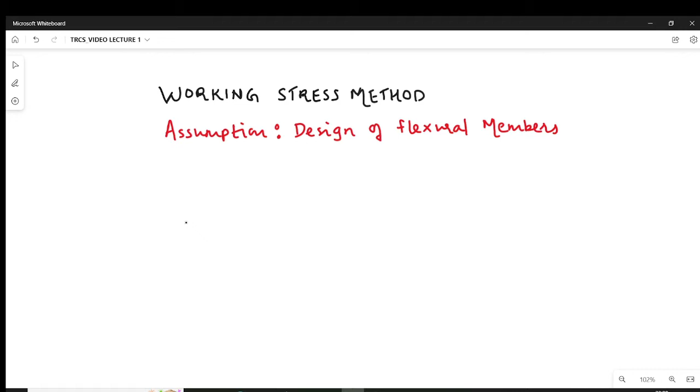In this video, I am going to talk about assumptions in working stress method regarding design of flexural members. Beams and slabs are called flexural members because flexure, the bending moment, is the predominant internal force in beams and slabs. That is why beams and slabs are primarily designed for flexure, though in some cases shear is also predominant. This is the first assumption in WSM philosophy with regards to flexural members.

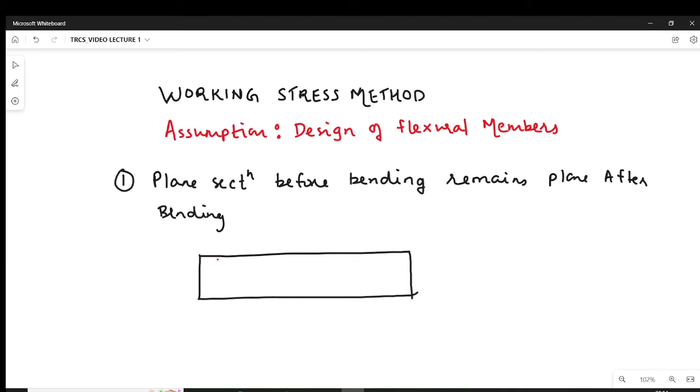Plane section before bending remains plane after bending. It is also the very first assumption in LSM philosophy with respect to flexural members. This assumption talks about the cross section of the beam - what happens to it before and after bending. Here I will draw the longitudinal section of the beam, and you can say it is before bending. After the application of load, the beam bends in this way. So this is the final profile of the beam after bending.

Before bending, the cross section is plane. Naturally it is plane, and something happens to this cross section after bending. The cross section is distorted, the shape is changed, but it does remain plane. It is not a curved surface, it is a plane surface. So this is the assumption: before bending and after bending, it remains plane.

One more thing we can derive from this assumption: the distribution of strain is linear. I will name here, AB before bending, and after bending it is A dash B dash, which becomes inclined. So you see, the distribution of strain is linear. This is the point of neutral axis wherein you don't have any strain. Above neutral axis, the section is subjected to compression, and below neutral axis, the section is subjected to tension, but the distribution of strain is a straight line. Linear means the distribution is straight line. This is what we can learn from this assumption.

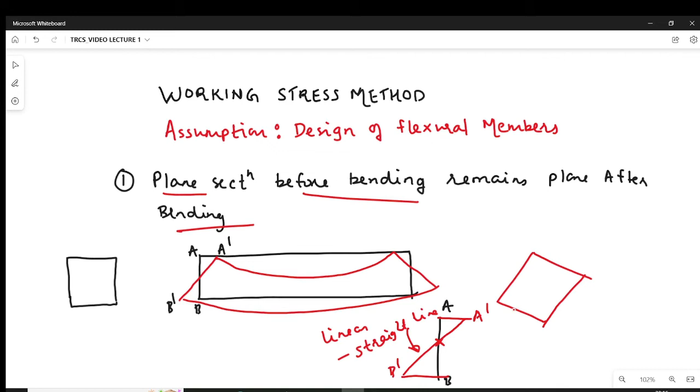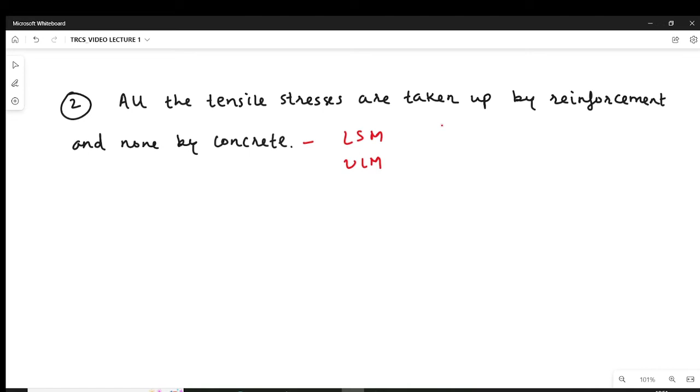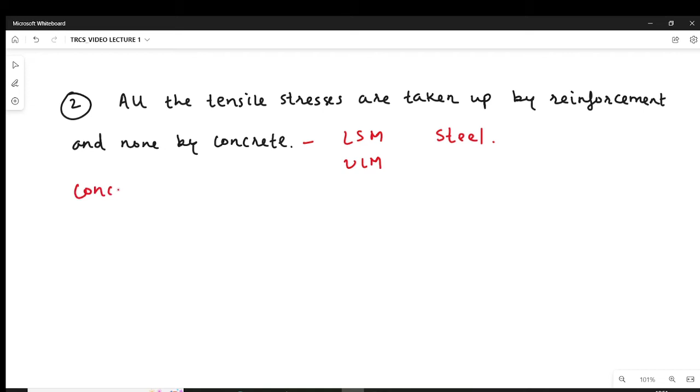Here we have the second assumption, which says all tensile stresses are taken up by reinforcement and none by concrete. By the way, this assumption is true in all design philosophies - in LSM, in ULM, we take this assumption. We say concrete is not capable of taking tension, so all tensile stresses are taken by reinforcement, by steel. This assumption goes by the basic properties of concrete. Concrete by nature is a brittle material, and any brittle material will not take any tensile stresses.

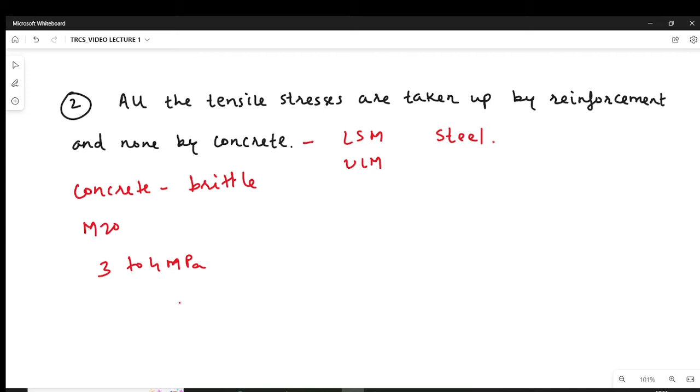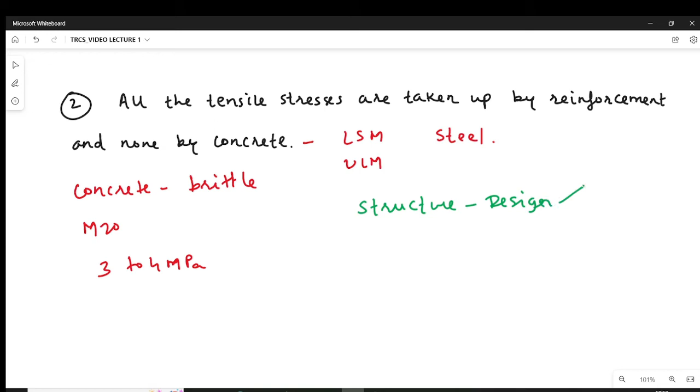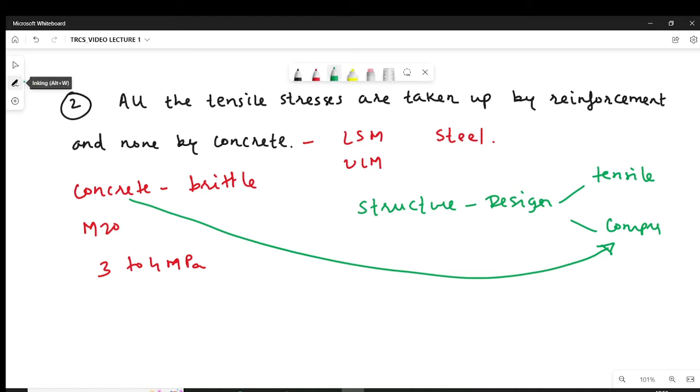But we do have some tensile strength of concrete. For example, for M20, we have tensile stresses up to 3 to 4 megapascal of concrete. This tensile strength is not adequate to take the tensile stresses in structures. When dealing with design of structures, you get two kinds of stresses: tensile stresses and compression stresses. So what we say is concrete will take all the compression. Since concrete is weak in tension, the tensile stresses will be taken by steel. That is the purpose of employing steel in RCC structure, to take the tension of the structure.

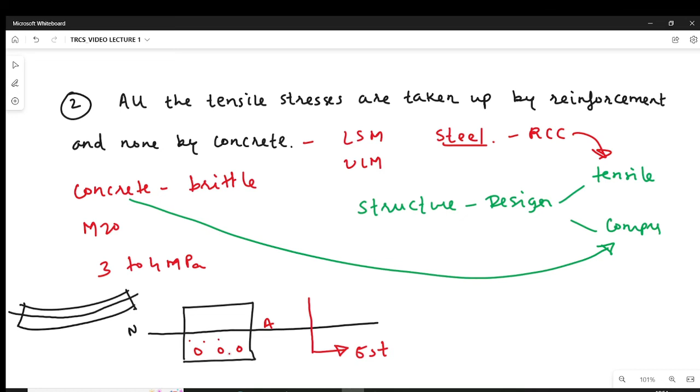We show at a point where steel is introduced. Above the neutral axis you have compression, and all compressions are taken by concrete. At the neutral axis the stress is zero, and as you go above the neutral axis, the stress increases. So you draw the stress distribution diagram from this point, because above the neutral axis you have concrete, and all the concrete is taking compression. But here you are not drawing any diagram; directly you show the stress at the point where steel is introduced. This is what we learn from this assumption.

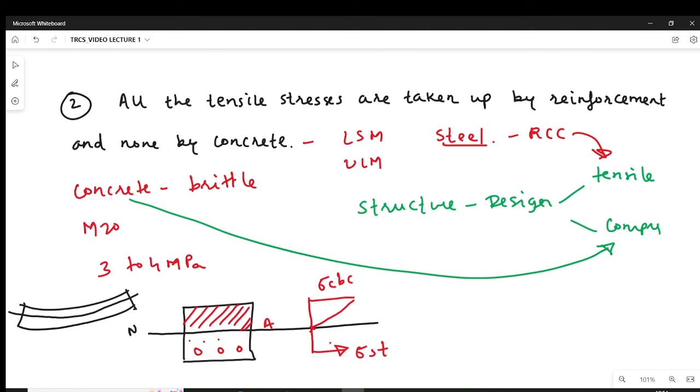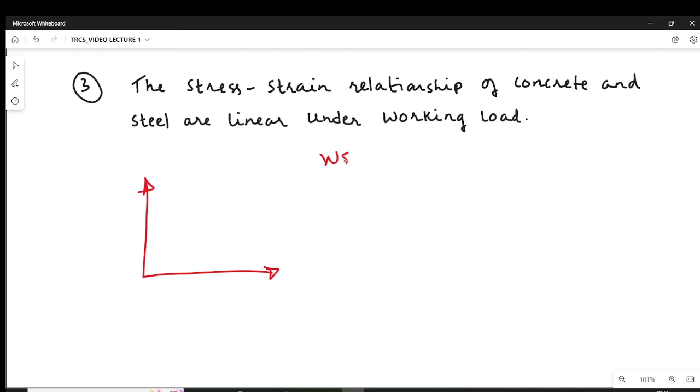Here we have the third assumption: the stress-strain relationship of concrete and steel are linear under working load. Whenever you want to see the behavior of any material, you have to put that material into a test and draw the stress-strain curve. We have two materials in RCC, concrete and steel, and one more thing you see in WSM, everything is linear with respect to material. We will talk about that. So you have to put the material into test and draw the stress-strain curve of that material.

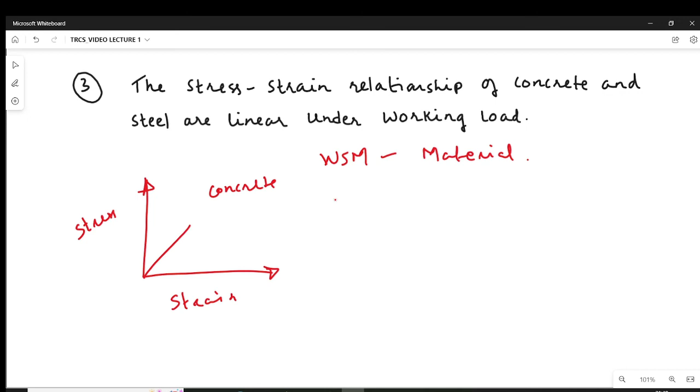When you see the stress-strain curve of a material, you depict its behavior, and you can judge how the material will behave under load. For concrete the stress-strain curve is linear, a straight line, and also for steel the stress-strain curve is linear, a straight line. This is for concrete and this is for steel. It says for both materials the stress-strain curve is linear, a straight line.

One of the reasons WSM is criticized is that it does not depict the exact behavior of concrete. There is some linearity in the initial phase for steel, but only up to some extent. Concrete is a highly non-linear material, and saying the stress-strain curve of concrete is a straight line does not exactly depict its behavior. That is why other philosophies came about. In LSM we have tried to show the actual behavior of concrete. We will talk about that when we study the LSM philosophy.

So here the assumption is that the stress-strain curve under working load is linear. Under working load - beyond working load you have the ultimate load - we have an indirect message here: at the ultimate load the stress-strain curve will not be linear. We can take that indirect message also, but under working load it is linear, it is a straight line.

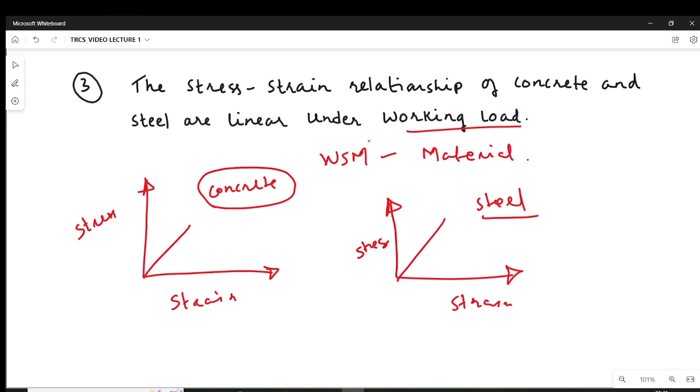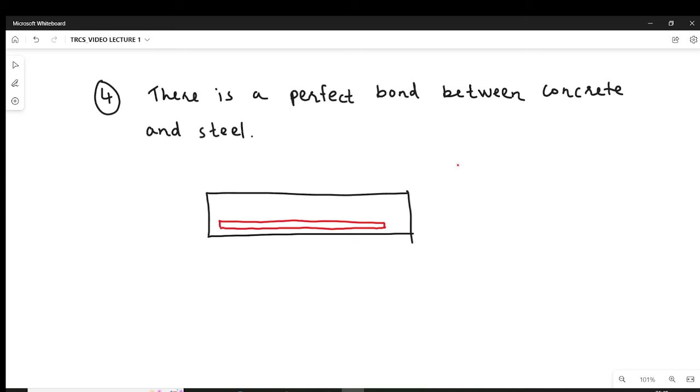Assumption number 4 says there is a perfect bond between concrete and steel. When we put steel in an RCC beam or any RCC element, we have to ensure a perfect bond between concrete and steel. Why? When the RCC element is subjected to load, there is a transfer of stress from concrete to steel or from steel to concrete. We have to ensure this transfer of stresses, and it can be done only when there is a perfect bond between these two materials. If there is no perfect bond, under load the steel will slip, and when it slips, there is no transfer of stresses between these materials.

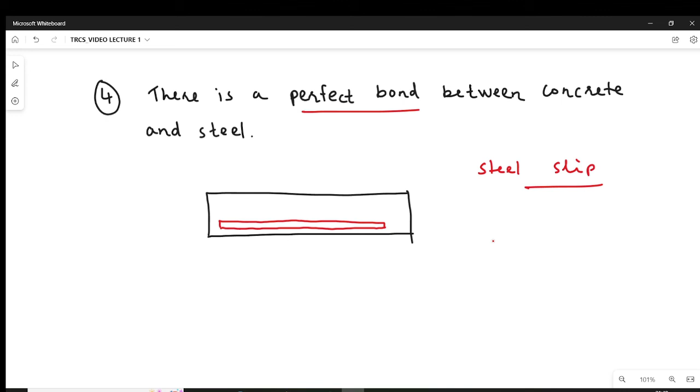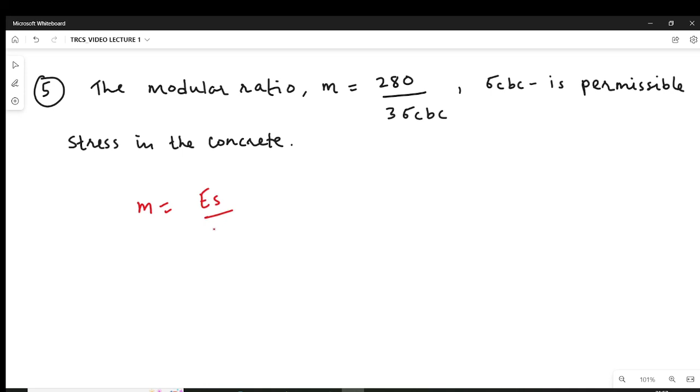Assumption number 5: the modular ratio M equals 280 by 3 sigma CBC, where sigma CBC is the permissible stress in concrete. They tell us to use this modular ratio when using the WSM philosophy. What is modular ratio? It defines the compatibility between concrete and steel, giving the relation between them when using WSM philosophy. Literally speaking, the formula of modular ratio is the ratio of Young's modulus of steel to Young's modulus of concrete - this is the formula, this is the definition.

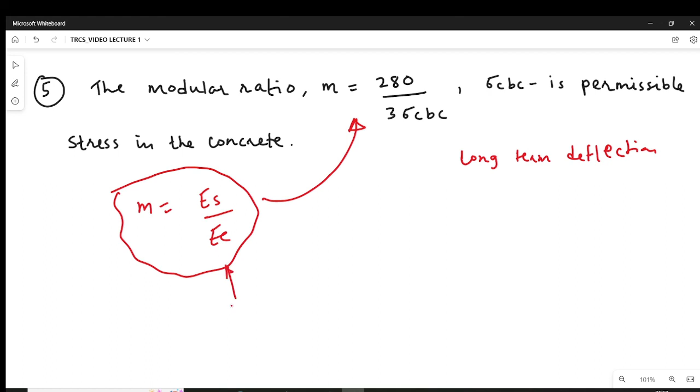So why are we switching from this formula to the other one? In the long run, concrete is subjected to long term deflection. When you are interested in short term deflection, short term behavior, you can use M equals Young's modulus of steel by Young's modulus of concrete, and it will give something related to short term duration. When we talk about the age of the structure, we have to consider long term deflection, and this is called creep of the concrete.

To consider creep of the concrete, IS 456-2000 has given the formula of modular ratio, and this formula is empirical, meaning it cannot be derived - it is based on numerous tests. So we have to use this formula, and we have completed the assumptions in WSM philosophy with respect to the flexural member.